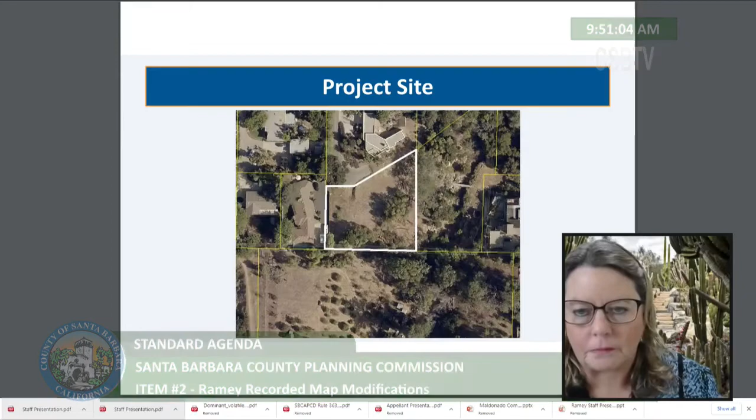The project site is located at 820 Cathedral Vista Lane in the Eastern Goleta Valley Community Plan.

The applicant is proposing to strike condition 15 of the parcel map's conditions of approval, which is that no development shall be permitted outside of the building envelope unless it is for access and fencing.

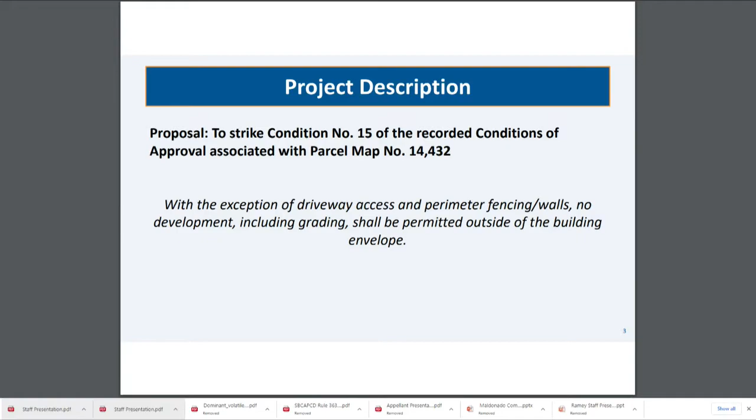At the PC hearing of August 26, 2020, the Commission recommended that the applicant work with staff to identify information required for review of the project and return to the Commission with a biological report, slope stability analysis and slope map, and identification of easements on the property.

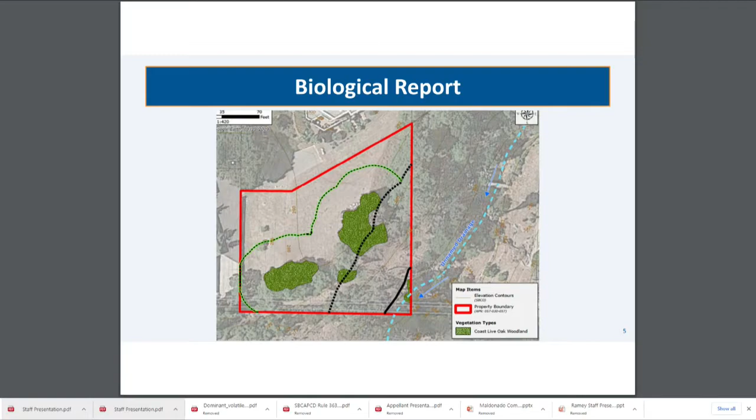The slope stability analysis concluded that the fill slope is not stable as configured, and restricting development to the building envelope would ensure that development does not occur on the steeply sloped area with unstable fill slopes.

Pursuant to the Eastern Goleta Valley Community Plan, any development on slopes greater than 30% shall not be allowed. The slope map shows that there are still steep slopes on the subject parcel, and restricting development to the building envelope would ensure development does not occur on these steep slopes.

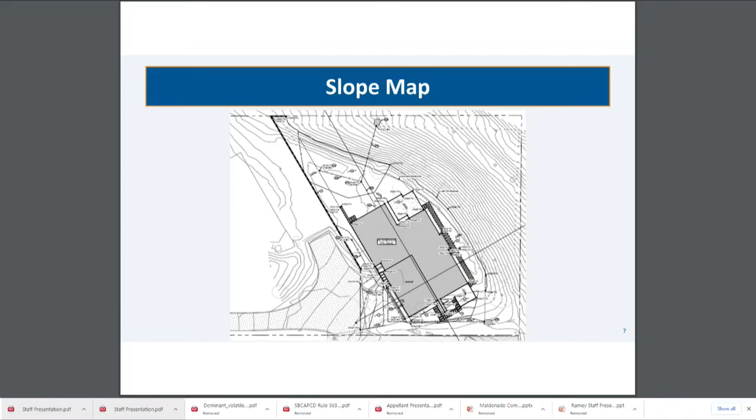The circumstances under which the parcel map was created have not changed. The project is exempt from environmental review pursuant to Section 15270 of CEQA, projects which are disapproved.

Staff's recommended actions have not changed since the August 26, 2020 hearing. Therefore, staff recommends that your Commission make the required findings for denial of the project, determine that denial of the project is exempt from CEQA, and deny the project.

This concludes staff's presentation. I'm happy to answer any questions your Commission may have. Thank you. Thank you.

Yes, Commissioner Park. I have some questions of staff.

I spent a lot of time out on the site with Mr. Ramey, and then listened carefully to our long substantive hearing we had there. I think Tess Harris was handling the case then. And I've got to confess, my understanding of this matter is going backwards after reading the materials for today. So I just want to clarify some things.

The slope stability analysis talks about an intention by Mr. Ramey to extend his yard out into the slope area somehow. And I don't see that intention communicated anywhere else, and I've never heard it from Mr. Ramey. Are you aware of some intention, some project to extend the building site out onto the slope area that's unstable?

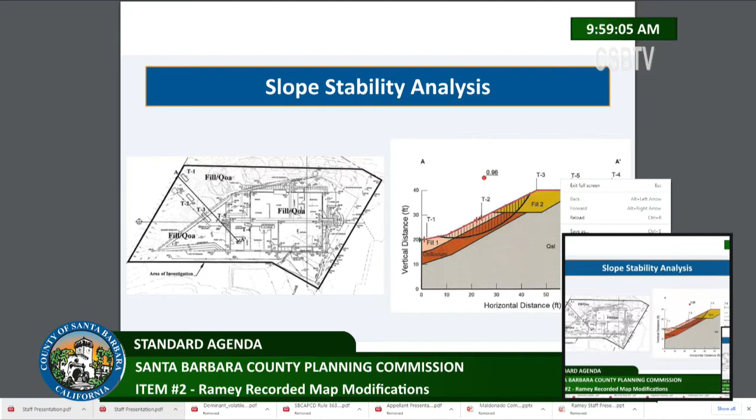The development envelope is the flat portion, and then the site slopes pretty quickly down, and that's where you see unstable slopes. Mr. Chair, does staff have a mouse available to trace what Ms. Harris just explained? I think that's very illuminating for all of us, because what she was saying is the T3 through T4 area, and then maybe marry it to the cross sections on the aerial site plan.

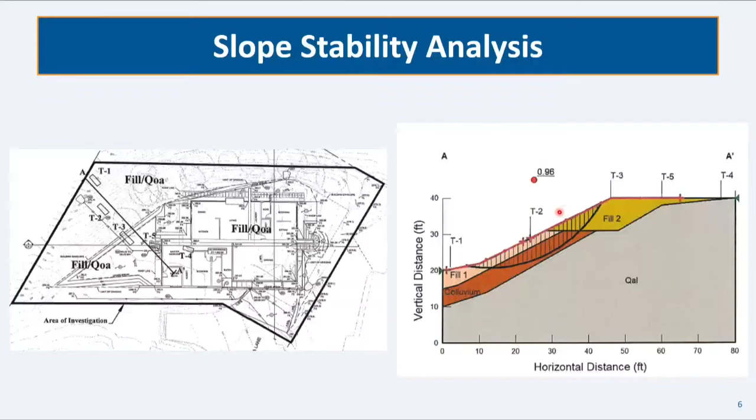I would like to support that request because I feel like the emperor has no clothes, but I've stated for months, I can't actually see these slides in any detail. So it's just a blur, and you talk about T1 or T3 or a dotted line, all I see is a blur. It's just the way things look on this end. I don't think it's just me. So I kind of need a more verbal description, like Commissioner Bradley said.

Okay, so it looks like—can you see the red dot, Commissioner Park? Yes, I do. Okay.

So let's go through that explanation one more time, if you could, Ms. Harris. Commissioner, through the chair, right here is the cross section of the area shown on the right, from this area right here. So you can see T1 is taken at this area, and then it goes down all the way to T4 here, and so that's what's shown here. So T1 would be here, and the area that Ms. Harris was talking about is this dashed area here.

So if he wanted to do something on the slope to deal with the poor quality of the fill there, proven by the slope stability analysis, this condition would bar that, wouldn't it? Chair and Commissioners, it's staff's understanding that's why the building envelope was put in place. There are unstable slopes on the property and environmentally sensitive habitat. Our understanding is that no development, with the exception of access to the site, would be allowed outside of the building envelope, including grading.

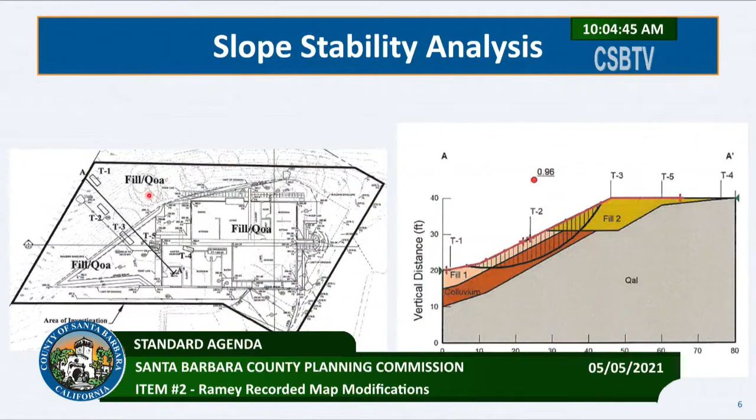And the ESH, it's not the whole slope - it's shown on the map as being in the southeast corner, near this tributary to Cieneguitas Creek, right? Commissioner, through the chair, yes, it's on the southern section. It's shown on this slope map up here. You can see the outlines of the trees - that's part of the coast live oak woodland, and further up, not shown, is the Cieneguitas Creek with the buffer area.

Yeah, okay, well thanks. If I have any further questions, I'll raise them later. Thank you very much. Commissioner Blau.

My question is - not wanting to actually deliberate here - but if you could pull up the map that shows the slope, the grading contours. Is he asking to put any buildings outside of the building envelope, or is it just the drainage from the site, now that we're putting a house and asphalt and impervious materials on top of the hill?

Chair and Commissioners, if you could just give us one moment, we're going to get the slide up again on the screen. Great, thanks. There you go.

Chair and Commissioners, Commissioner Blau, that's correct. So you see the structure is within the building envelope. Where there was concern is the grading associated with the structure, and then I believe there are some elements still outside of that envelope - perhaps it's drainage, I don't know if there's any other. It appears that's really the primary issue, but the grading associated with the residence is outside.

Now let's go on to the next piece, which I see consumed a lot of time, but I think it'll be simpler than first meets the eye. That slope is kind of a concave slope. Also running through that slope is a ditch, not a drainage ditch, but a ditch to carry water that has been gathered on the roof of the structure, and to direct that water down towards the creek, which is the natural outfall.

I've always had the ability to drain it to the other side of the property, the east side of the property. After consultations with my neighbor, Teichman, I concluded that he was concerned that putting more water in this swale might cause him some issues on his property, because of the way things are laid out. But for me, I have actually no problem directing it in the other direction. In order to do that, it requires digging a trench, putting in a drain, et cetera.

I have really two interests in this northeast corner of the property that has this extra steep spot. The fill is loose, as detailed in the slope stability analysis, and there's an easy fix for that. It's done all the time, and it would also round out that slope a little bit to make the landscaping a little more aesthetic and practical.

It really has nothing to do with the building itself, but it would require the remediation of this loose fill, which would require a grading permit. The existence of this condition, the way it's phrased, would prohibit those who authorize the grading permit from permitting the remediation that Mr. Kammer suggests in his report.

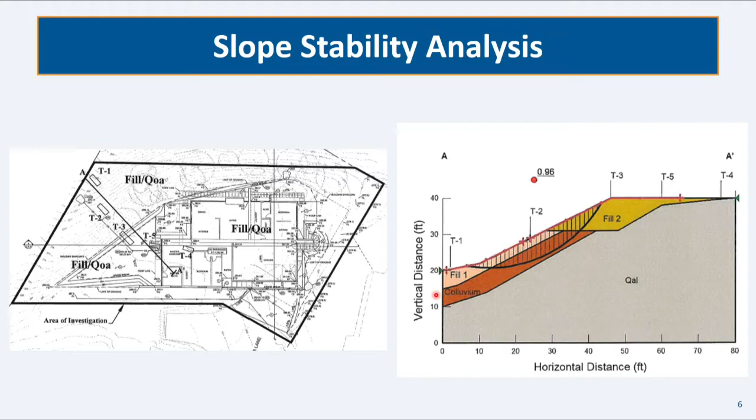The slope map is included as part of the submission we made to Ms. Brown at Planning and Development. All the submissions we made took some time to prepare, but we tried our best to fulfill their requests and requirements. We delivered their submissions and reports, and they were accepted without reservation. So the only one we have left to discuss is the slope map.

The only question about the slope map arises in places that are actually graded. Most of the property is not graded, and therefore the issues of slope, according to the ordinance, are not addressed—one is not required to. The grading ordinance, plus the Goleta Valley addendum to it, really addresses how much slope you're going to leave when you're done grading.

For now, the only little bit of grading that our grading plan specifies is a small bit of fill on the western edge of the property. The engineer—and that's part of what we submitted.

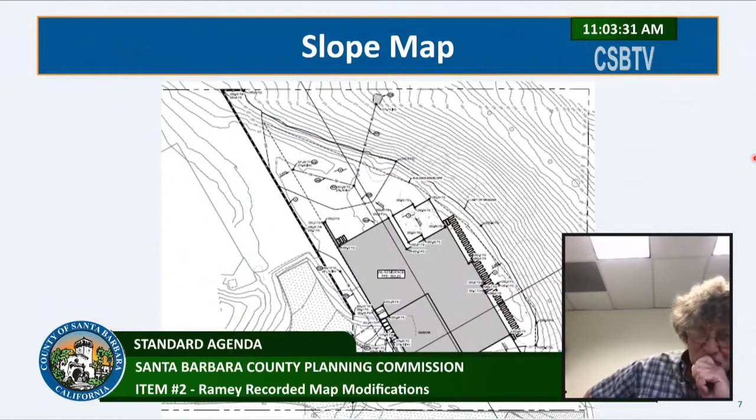Okay, on the slope map is a diagonal line that starts at the center bottom and trends to the right, to the center of the right edge of the map. I hope staff can understand which line I'm referring to. Is that not in fact the cross-section line for the cross-section on the slope stability analysis? Isn't that the same line?

Commissioner, through the chair, this slide is actually oriented differently than the other one. It came straight out of the report, but the cross-section was actually in this area. The line isn't shown on this map, it was in the other report.

Okay, all right. Regardless of what we do with condition 15, if any property owner comes in with plans for actual building and associated improvements, it will have to receive other permits, including from the building department. At that time, there will be an analysis of what's an appropriate foundation, appropriate drainage, all those things that get analyzed. Isn't that correct?

Chair, Commissioners, that's correct. And then the ESH and ESH buffer would also be looked at that time.

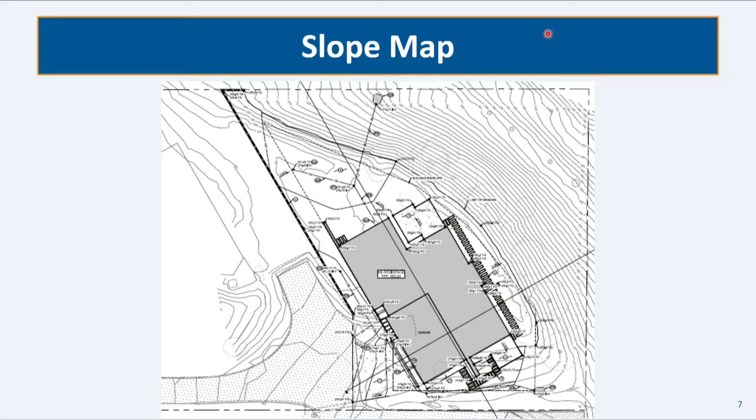Commissioner Park, your hand's still up. Are you... Well, I raised my hand, so yeah, I would. Okay, I would like to speak.

Good. Just to add in, I'm not going to support modifications to condition 15. I would actually make, in fact, I'll just do it now. I'll make a motion to support staff's recommendation and deny the request to remove condition 15. That'll be my motion for now to get the moving discussion along.

Okay, Commissioner Cooney. I'll second the motion, Mr. Chair. Okay, thank you. Commissioner Park.

Yeah, I can't support that motion. I wouldn't support that motion, and I wouldn't support a motion to delete it. I think that condition 15 serves an important purpose, and it is a standard condition, and it should be. And it's kind of an obvious purpose. If you have a building envelope, well, then we're not going to allow development outside of it.

That being said, there are practical reasons to have some development outside of it. I would actually be concerned, were I county counsel, that a younger version of me that was more creative and energetic might argue that if you have a building envelope where you allow construction, but as a practical matter, you deny any way to drain it or otherwise, you are in a sense removing reasonable development of the lot, and that's inverse condemnation. And whether that's a good argument or not, it's a practical point here that to reasonably develop this site will take some drainage and some things.